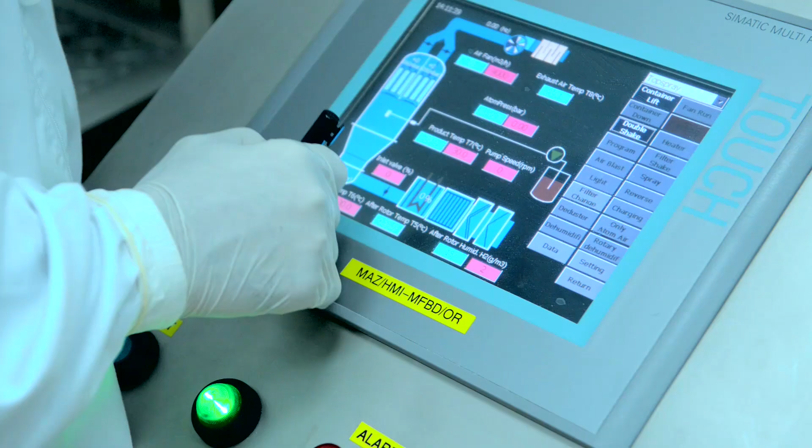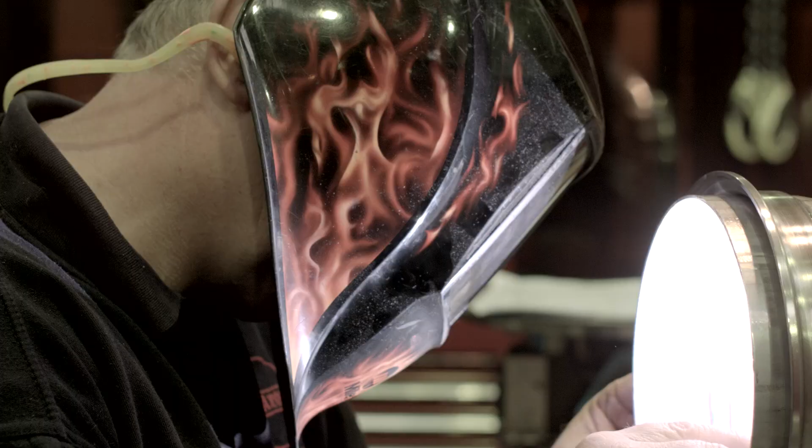There are many industries that rely on effective filtration, including pharmaceuticals, food and beverage, oil and gas, automotive, chemicals, and water treatment facilities. Amazon Filters is a company with a proven track record for reliability and performance, supplying filter equipment to the process industry. We manufacture a range of cartridge filters, bag filters and holders, which we call housings, that they fit into.

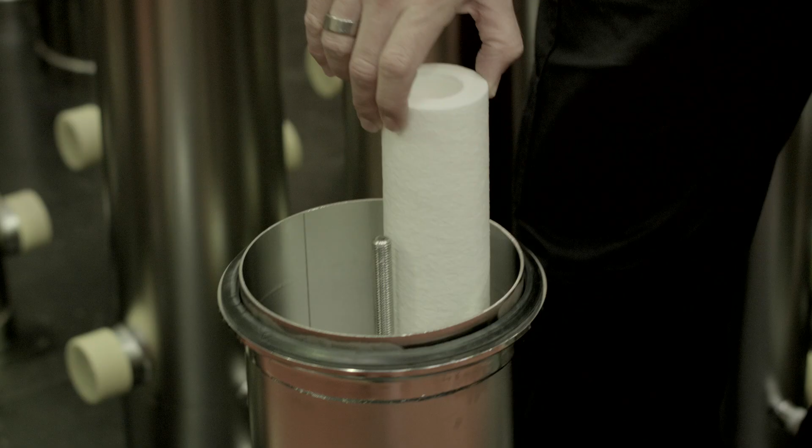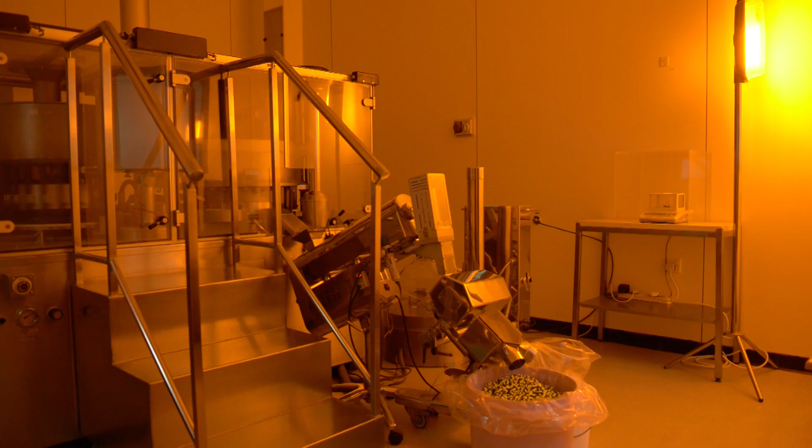The purpose of a filter obviously is just to remove an undesirable from a process stream, whether that be a liquid or a gas. It's crucial to get appropriate filtration for your process, because if you don't actually get it right, then you might as well not do it. A lot of the filters will be used in safety critical applications, so sterile beverage manufacturing, pharmaceuticals. Things where if you get it wrong, the consequence of saving a few pounds can be at the risk of your own reputation and of course the safety of your ultimate customer.

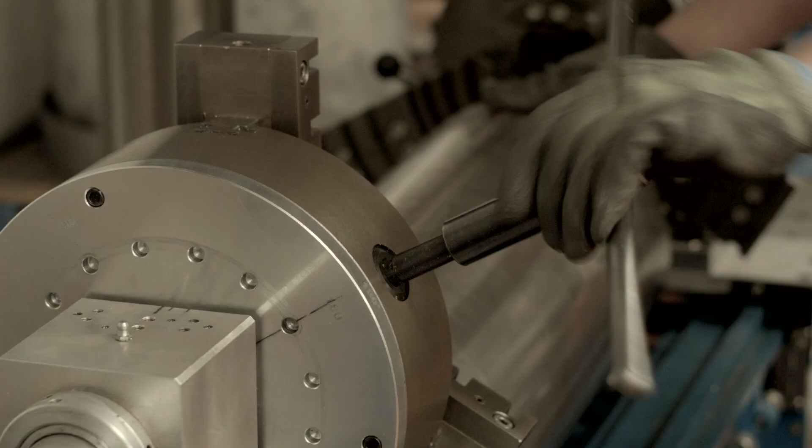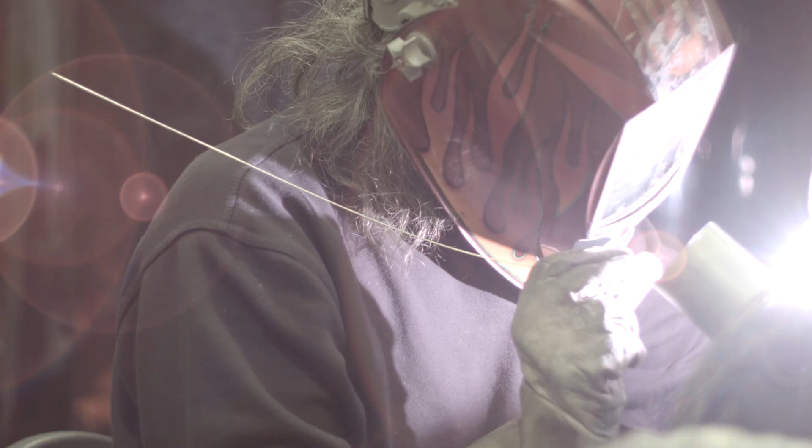Amazon Filters was founded in 1985 by Mike Pizzey, an experienced engineer himself. At the time, most of the filter housings available were standardized off-the-shelf systems. So by listening to what the filter companies wanted, he was able to develop a range of housings that were more customized according to their needs. We'd always made lots of special variants of our products, but we didn't really advertise the fact. We just did it when somebody asked us. So we embraced that philosophy. I think it was one of the best decisions we made. I think that's been one of the key drivers of our growth.

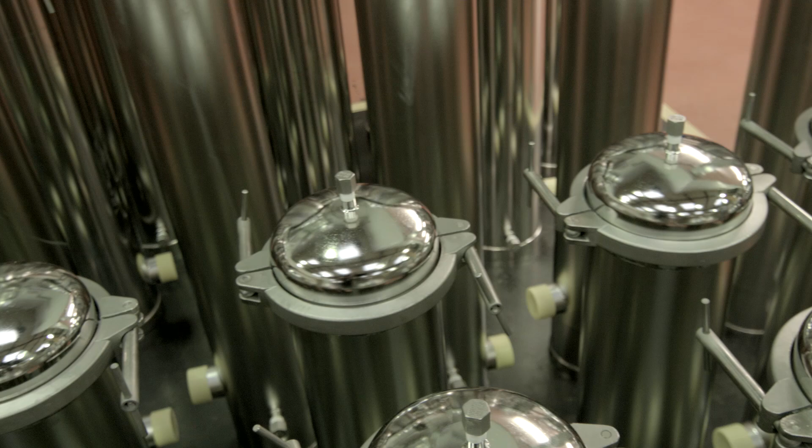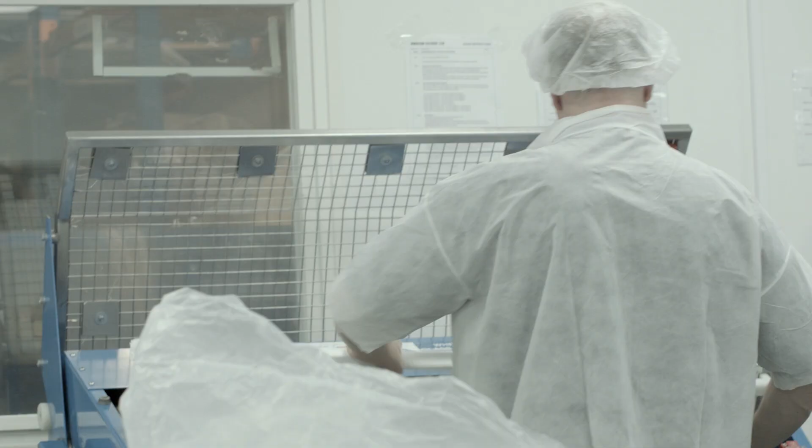Identifying a new market potential, it wasn't long before Amazon Filters began manufacturing their own brand of filter cartridges. But having built up such a good reputation for filter housings over the years, it hasn't always been easy to communicate the full range of products and services on offer to clients. We're doing about 30% of our sales for filter housings now and about 70% for cartridges. We are a significant cartridge manufacturer now, and we make them at good levels of specification with a high capacity. So making sure the market understands that our capabilities are much more than they were 10 years ago is a very key factor for us.

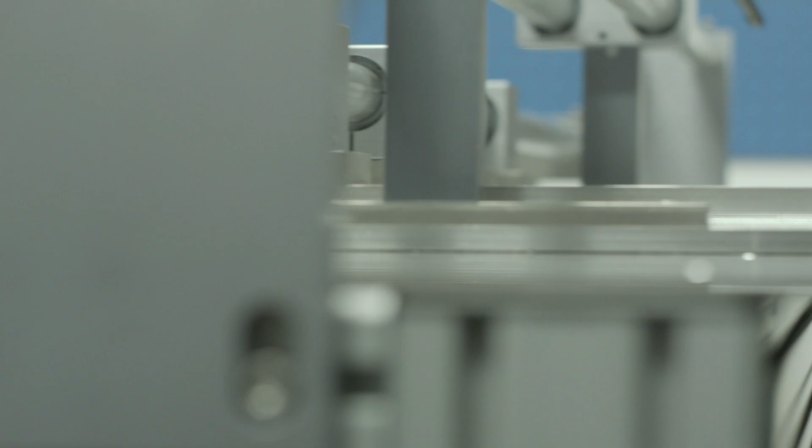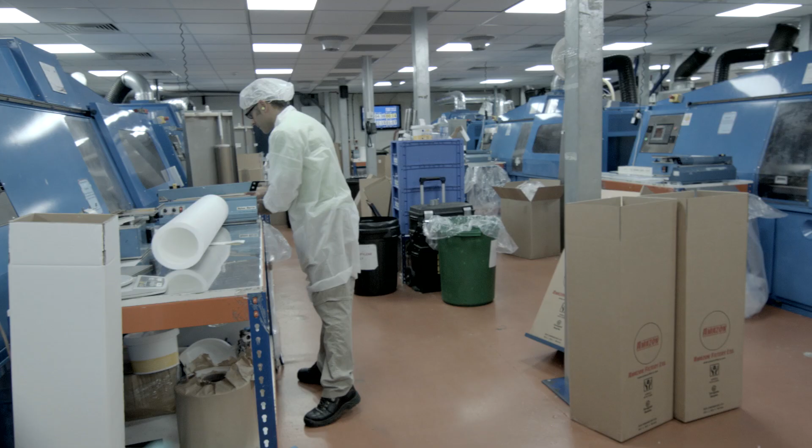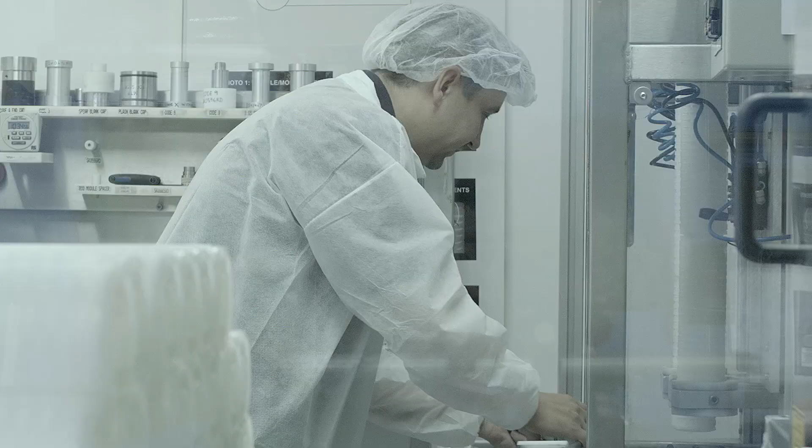Independently owned and more flexible than a corporate multinational, and yet with a much better reputation than Far East rivals producing low-quality, low-cost counterparts, Amazon sits in a unique position within a global market. We're never really going to be as cheap as some of these importers, and we don't set out to be. What we do have is a high-quality product, and we are consistent in relation to what we make. So each and every time you're getting the same product, to the same quality, to the same specification.

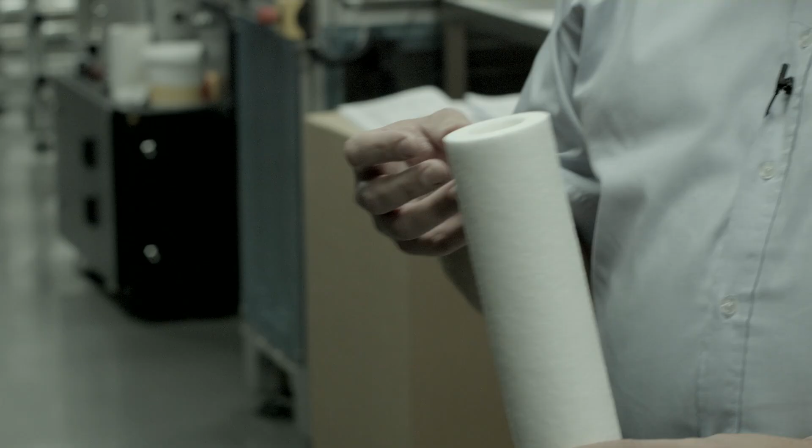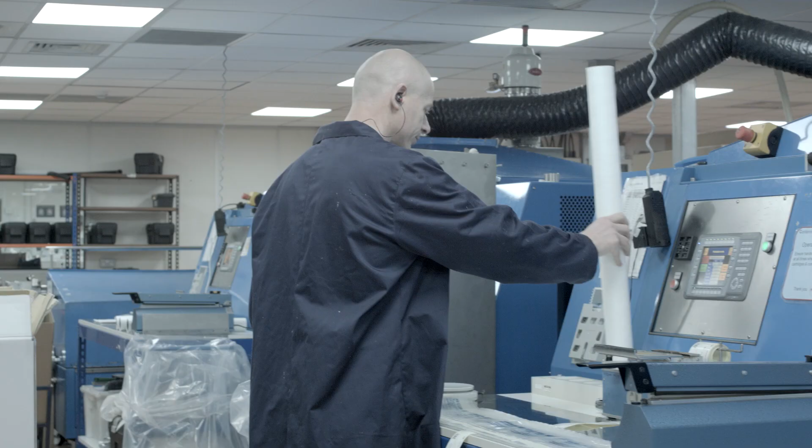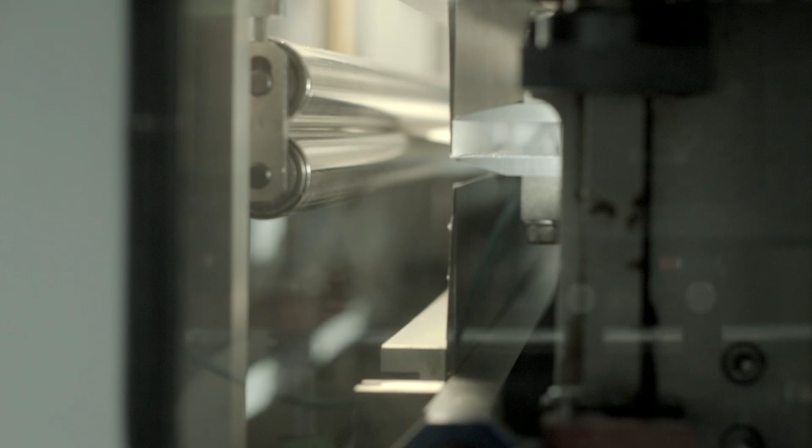So Amazon make both pleated and depth filters. What I'm holding here is a depth filter. The concept you use on a depth filter is that the larger particles in the process fluid are trapped on the outside of the filter, and progressively you catch the smaller ones towards the centre. In terms of actually making one, that means you've got to have very close control of your fibres, so you can change the size, the porosity and the matrix of the filter during the production process. The alternative commonly used filter is a pleated type. Now this uses a slightly different mechanism in that it has a high surface area of folded filter media in flat sheet form. That's ideal when you've got lots of particles all the same size as each other, because it can catch lots of those.

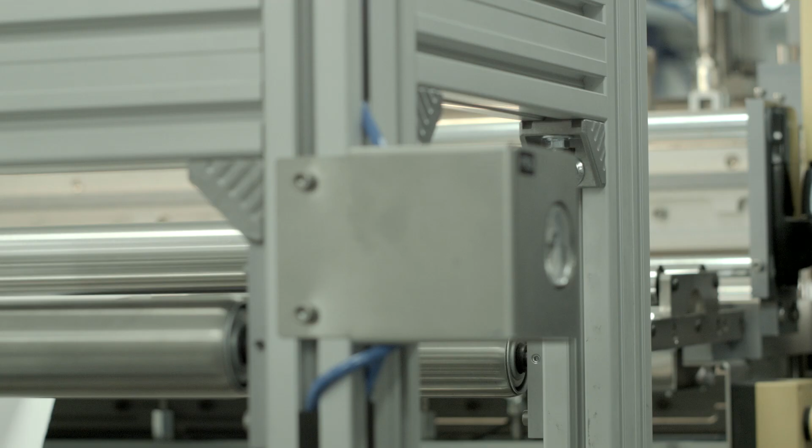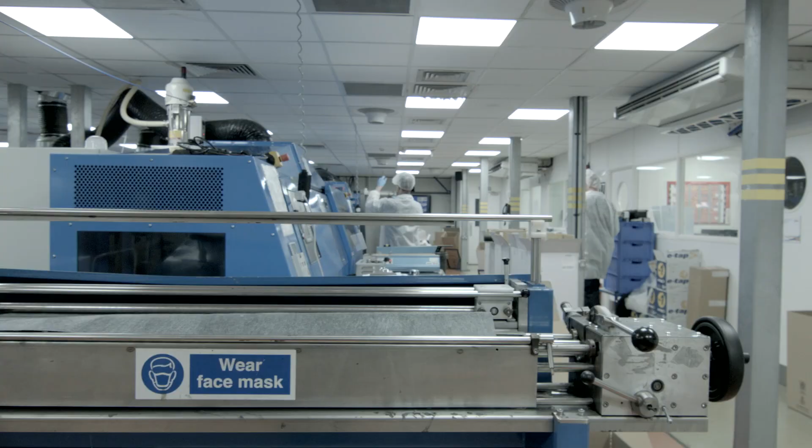We believe it's really important to have a supplier who understands the full filtration process, and that's one of the things we offer differently from many others. We make the filter housings, we know how they install in the system, we know how they interact with the filter cartridge that's installed in them. Very often people completely discount that part of it, buy a very expensive fine filtration cartridge and forget that it's being installed into a very low quality housing, which can actually mean that it can't possibly work to perform its full function.

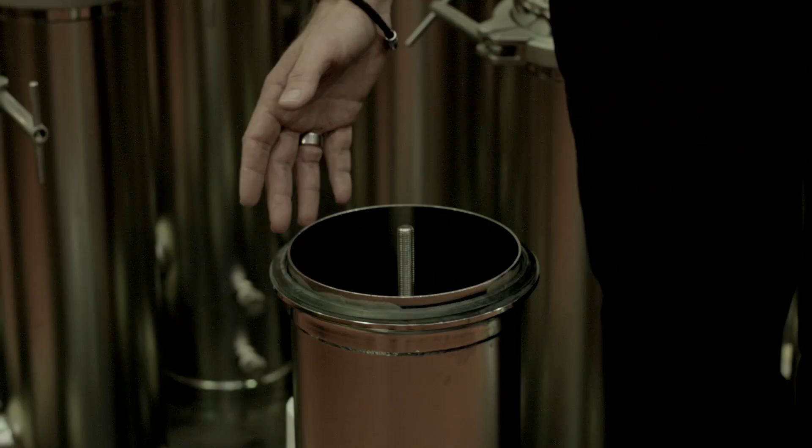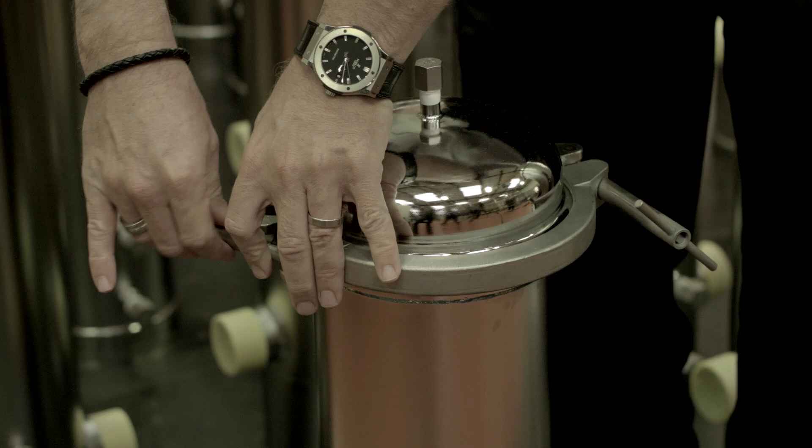So this product is what we call a cartridge filter vessel, which we do from very, very small single cartridge, so a product that will fit in your hand, all the way up to vessels of several tonnes. So these vessels are designed to last for many years, and we still do get regular spares requirements for units that could be 20 years old. So they're all stainless steel construction and fully TIG welded.

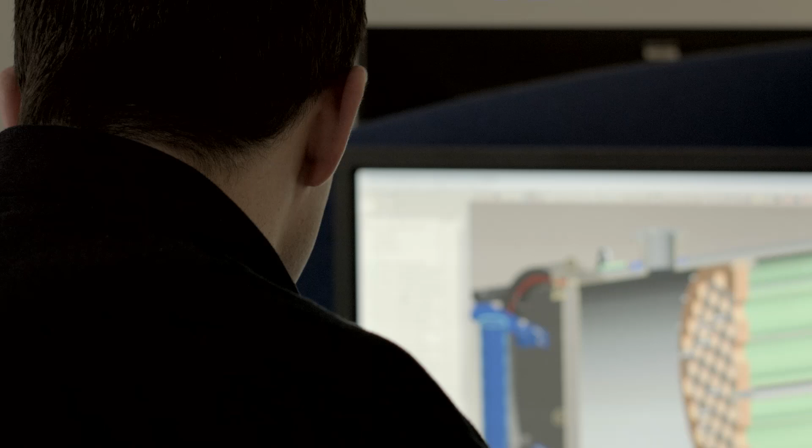Having their design, manufacturing and distribution operations all located in one premises has its distinct advantages, alongside providing a great deal of control over quality, cost and lead times. We've got a design guy making a new housing or designing a new housing. You can go and find the cartridge, you can go and find the process engineer that designs the cartridge. Does it fit? When you install it, can you remove it properly? These are simple things, but they're very easy to get wrong, and I've seen some horrendous installations just because that understanding of the two different components of a filtration system wasn't considered at the design phase.

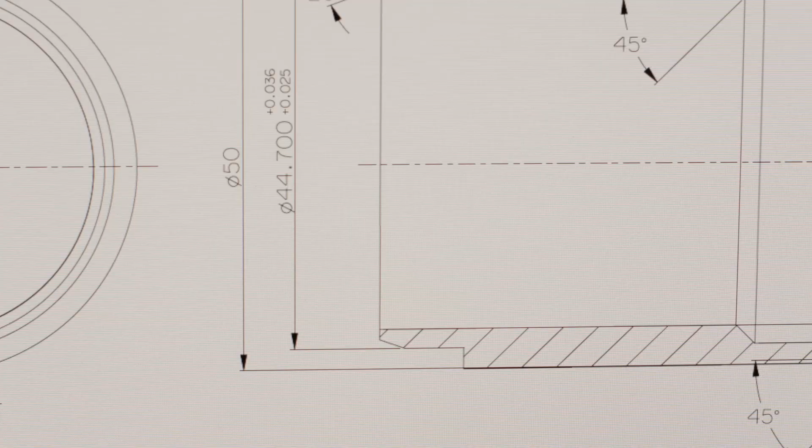I think Mike, being an engineer by trade, has been incredibly useful for the company to help set the standards required for a quality product that we deliver. And Mike's desire for perfection, I think, has rubbed off over the years on many of the staff within the company. Amazon may be a family-owned enterprise, but that doesn't hinder their vision for future expansion beyond Europe. We definitely have ambitions to be stronger in North and South America and in Asia. So our ambition is to improve our reputation, spread it wider, have a bit of fun while we're doing it, but fundamentally, I think if we focus on the values we have and the strengths that come from those values, then we'll achieve the other things as a consequence of that.